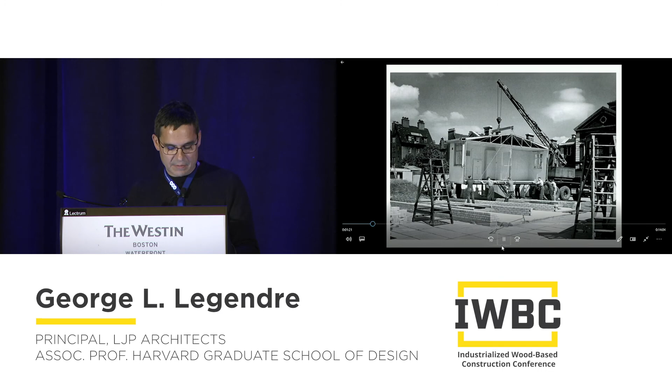Sometimes it seems that OSM is like a new material, like graphene or polymer, a new material with wondrous possibilities. Well, not quite. Because OSM is not that new, is it? This German gentleman, the Bauhaus, first proposed it 100 years ago as a socially progressive model for mass housing. And indeed, affordable housing has been its vocation pretty much throughout the 20th century.

Today, however, while need remains an important factor behind OSM, it's no longer the only one. You see, desire in all its contemporary forms is equally important. I'm thinking consumer politics, digital technology, social media culture, and of course, money.

In Portugal, for instance, timber joiner Mima markets OSM as a luxury product rather than building. This is industrialized timber, and architecture for that matter, marketed as desirable accessories rather than the stuff of home or shelter. These ads suggest a return to the basics of dwelling and sitting around, but in truth, the product is quite expensive. The new minimalism isn't about ending consumerism. It's about taste, luxury, and inevitably about exclusion, a far cry from the real places where such dwellings remain the norm.

Digital technology is chipping in as well. Cover, a small LA-based company with a secret house design algorithm, sees OSM as architecture's answer to Tesla. House design algorithms are an old, perhaps futile claim made by at least two generations of digital designers. But coming from Silicon Valley in the age of Uber, we could be ignoring this one at our own peril. And by the way, Cover collects credit card details from its clients before even meeting them. I think we could all learn from that.

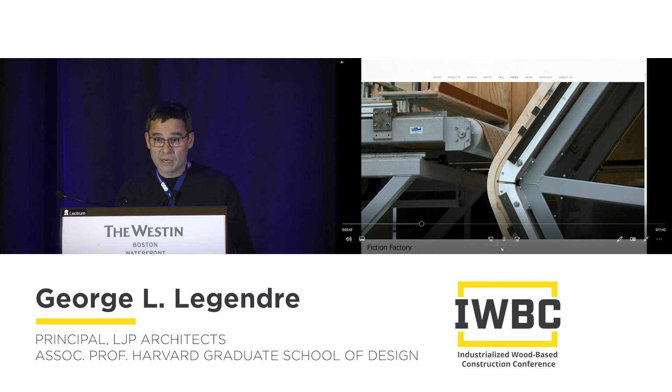OSM is often perceived to be about objects rather than places, and that's sometimes true. How else could you explain that in this Amsterdam factory, a group of makers creates houses by spinning recycled wood pulp around an axle. Yes, that's right. These people make homes like airport staff wrap suitcases with protective cling film. And it works beautifully. But maybe it's hard to take it seriously.

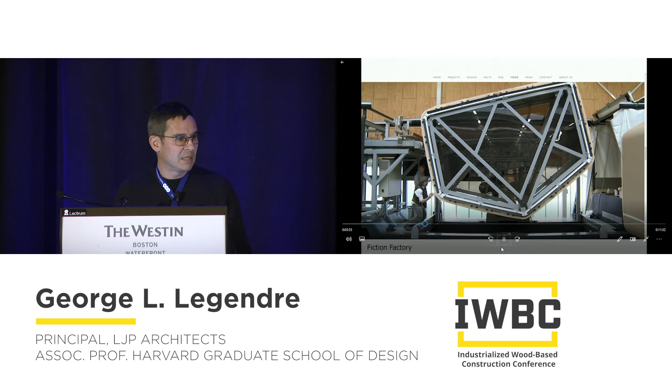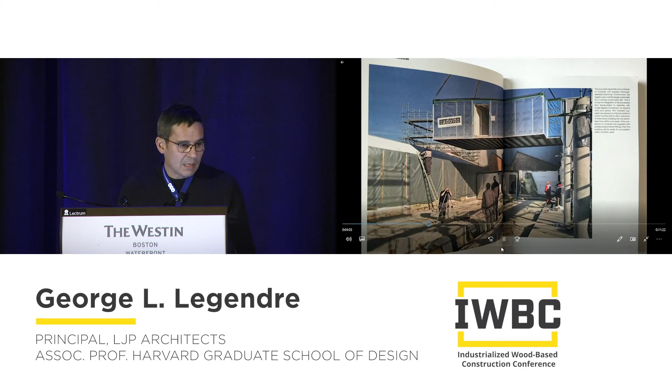And yet, OSM is not only about objects and one-offs. In post-industrial Manchester, the local urban and architectural language helped revive, one CLT box at a time, that enduring icon of European urbanity, the Edwardian terrace. In 21st century Britain, a culture completely obsessed with a house, these prefabs by architect shedkm are among the most desirable homes.

So in the UK, where Robert and I live and work, that is now the way of the world. A few years ago, a venture fund wishing to invest in housing would have reached out to developers, urbanists, engineers, architects, and local officials. Today, it's more likely to start the conversation by building itself a futuristic home factory.

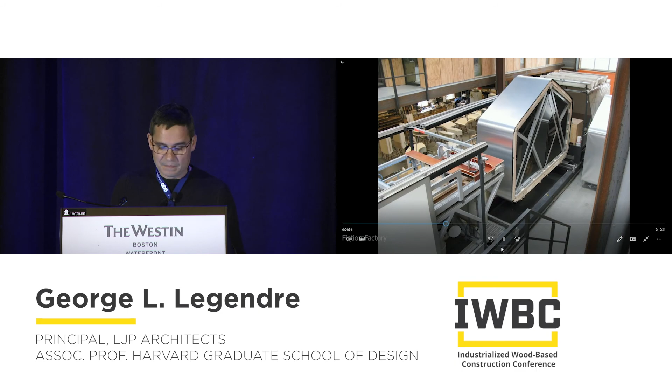So yes, the social modernist project pioneered by the League of German Gentlemen is happening, all right, but in a pluralistic, unplanned, capitalistic way. So this new world is our background as designers, and it's very exciting.

When sometime during the next 10 years the economies of scale kick in, OSM will be cheaper and greener than conventional construction. But there's more to it. There are a lot more reasons why industrialized construction is important to us designers. The real draw lies in recognizing that it's all about process, and a conceptual process at that.

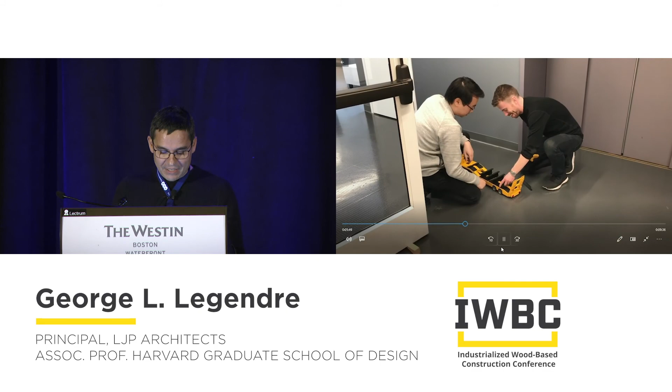First of all, there's the primal pleasure of working that way, and it doesn't go away with age or education. These two grown men, and soon to hold a Harvard degree, hopefully, rediscover their inner child while exploring sophisticated integrations of transport and construction.

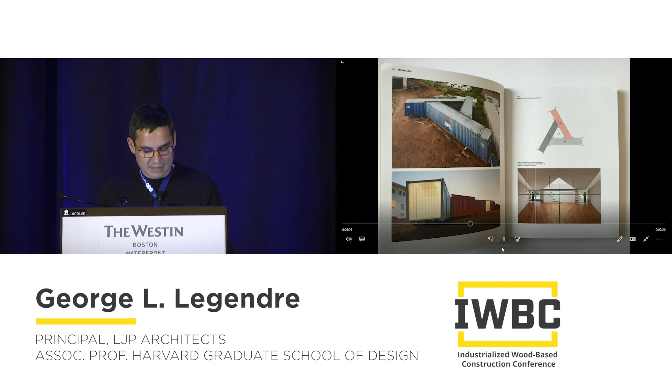With OSM, simple constraints inform our thinking: protocols of assembly, tooling, the width of a room, and of course, the width of a freeway on which it is trucked, one piece at a time, like a gigantic model from the land of Gulliver.

Architect Andrew Waugh says that the width of the motorways will determine the form of future cities in the same way that a standard plot width determined the form of Victorian London. And he is right.

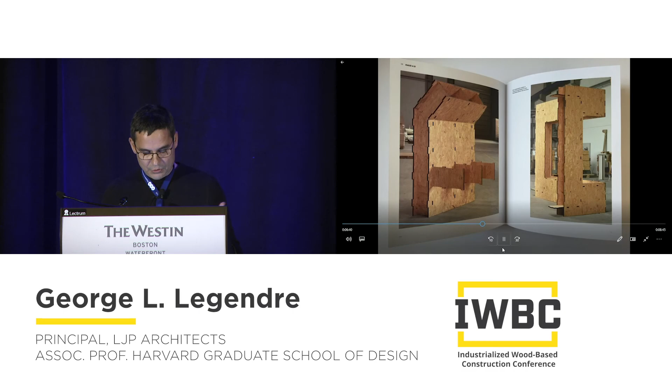And there's more. With its scale shifts, design patterns, and strangely direct translation from making to building, OSM has as much in common with the work that takes place here in the studios of the Harvard Graduate School of Design as it does with traditional building.

Sometimes I even think that people out there in the industry aren't making buildings at all, that they're making one-to-one models. Or maybe it's the other way around. Robert and I were intrigued by the comparison, so we set out to systematically explore it for 2 years.

My group approached the subject through making. We made models to understand the process of construction and delivery, models that serve as both design record and proof of concept, if you like, models as buildings.

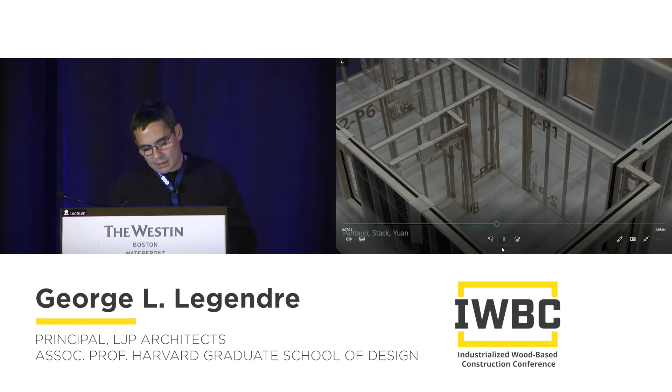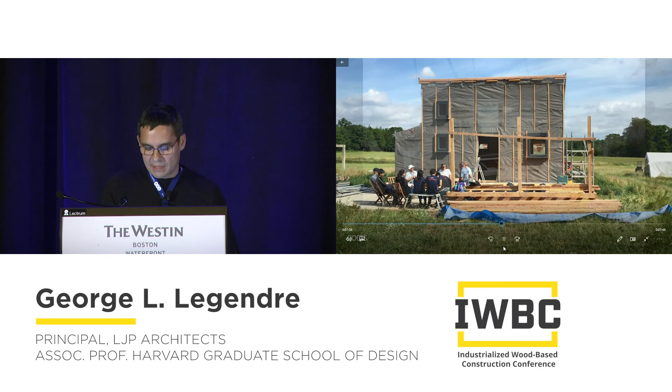Robert introduced the case studies in his talk, Multiply by WTA, shown here in the courtyard of the V&A in London, Riverford Gardens and the Falkland Bothy up in Scotland, the futuristic Dyson Institute in Wiltshire. These projects couldn't be more different in scope and budget, but they were all planned and built in the same way.

There are 3 key drivers behind our interpretation of OSM. The first is transport.

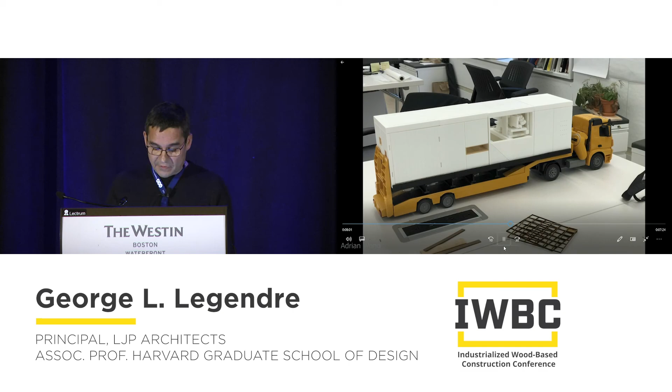OSM is about building anywhere that is, except on site. And that makes a lot of sense from the vantage point of quality control. Proponents of OSM will ask sensibly whether you'd buy a new car built in a field. So, OSM doesn't care where your site is, so long as the delivery man can reach it.

It's a little bit like Little Chef, the British roadside diner, where the omelette on the menu isn't actually an option because, the waiter explains, head office hasn't put one in the post this morning.

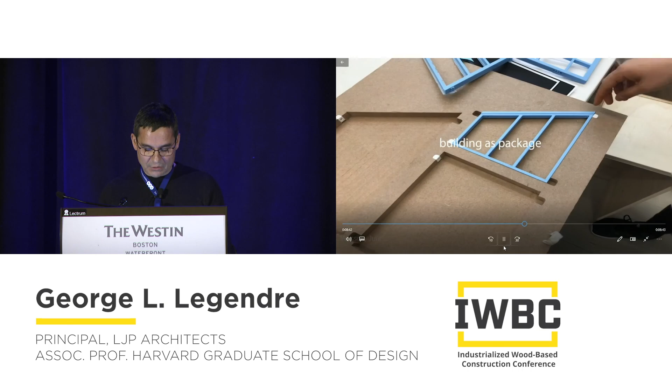So we looked at construction as a packaging problem, building as suitcase and building as crate. This, by the way, is already happening in practice. At CCG, closed panels are carefully gift-wrapped at the end of the assembly line.

So we spent time exploring that problem, the problem of packaging, crating and decrating our future homes, and exploring visionary ideas at a smaller and experimental scale.

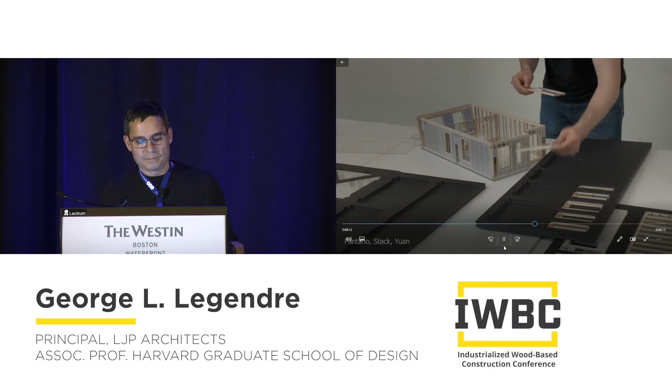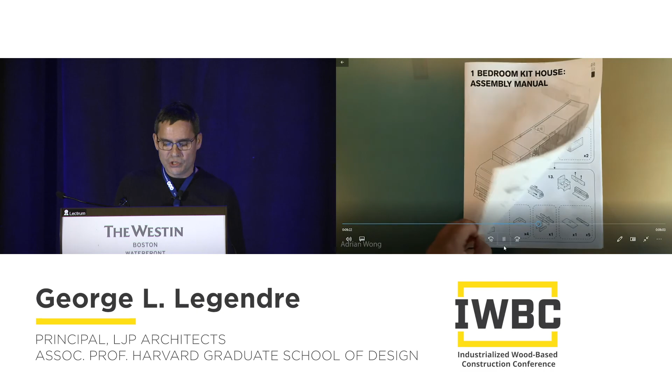Our second driver is the role of construction documents. As product design, manufacturing, and construction increasingly merge into one, tender packages in the future could look like self-help assembly manuals, like IKEA super brochures of sorts.

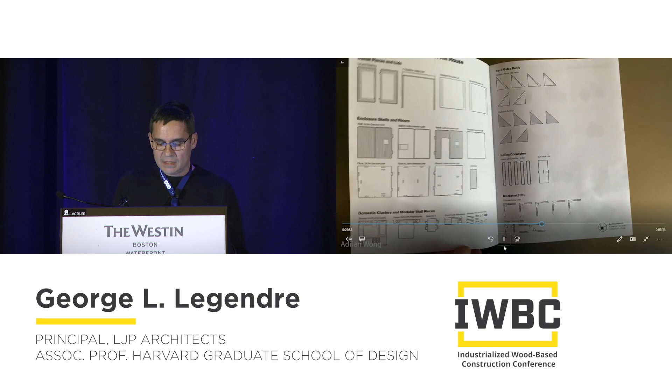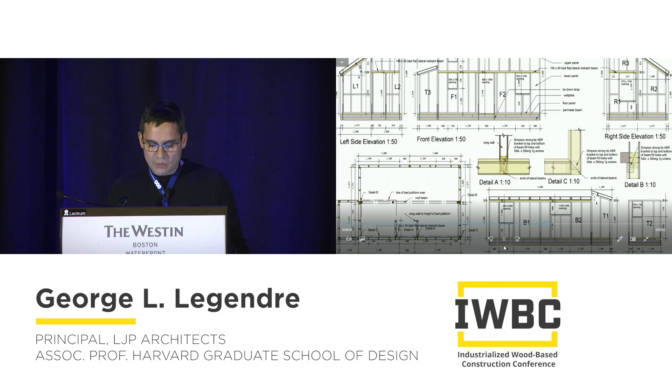We looked at this scenario in terms of graphic design, but also in terms of construction. Processing the original documents supplied by Robert was a key part of that approach, the raw material of the process.

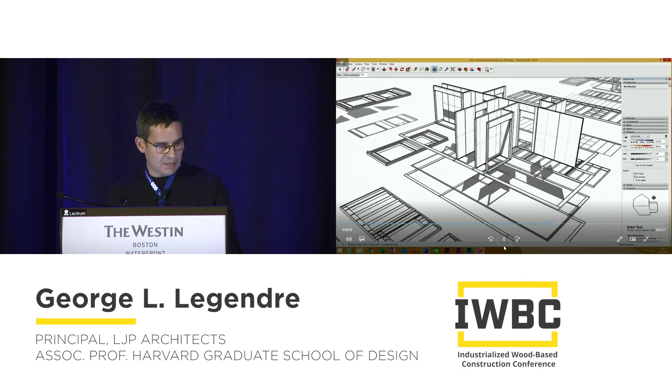And the 3D models developed by the contractor and shop drawings coming from them are at the same unit-free scale, so we can use the same data to cut a timber at 1:1 in a building workshop or 3D print nylon at 1:30 on a kitchen table.

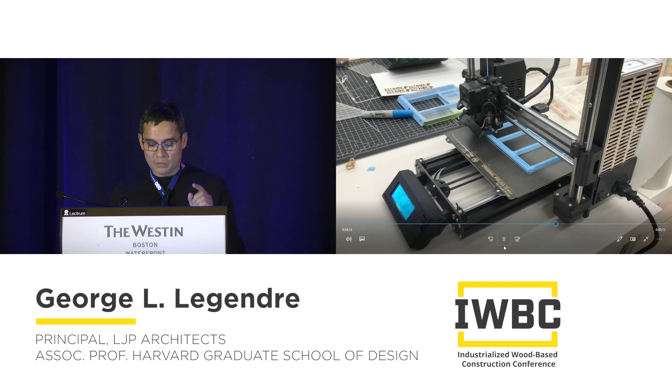There are a lot of analogies between these two processes, of which more later, but what matters here is that they share a single starting point.

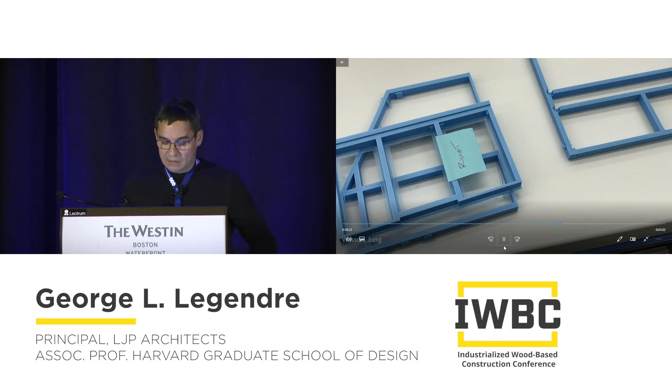Off-site manufacturing means building by numbers as well as letters, so OSM won't work unless the parts are clearly labeled. Labeling is an integral part of the design process. We do it in our own practice in London, where a kit of parts and a labeling protocol are both mathematically generated.

With the same protocol finding its way seamlessly into construction, we saw something similar in action at CCG, where every single loose joist on the factory floor has a unique ID, usually printed, sometimes scribbled by hand, and held in a master list moving from monitor to monitor as the panel makes its way through the assembly line.

Of all the factory floors I've been to, and there aren't that many, I have to say CCG seemed to me by far the most futuristic. And don't get me wrong, there are no robots or drones around, just people. Drones are still a few years away. But I'm not talking about hardware, I'm talking about the firm's mindset.

CCG's rigorous automation of the assembly process, complete with performance indicators and productivity bonuses for machine operators, offers a plausible vision for the future of construction.

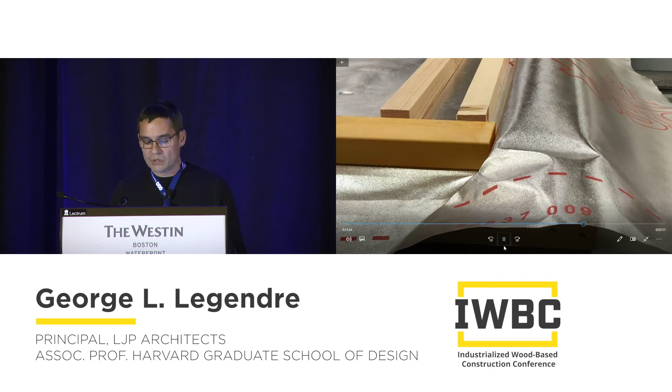No OSM without proper labeling then, so we made sure that labels were properly integrated in our designs and dramatized for effect. Our goal was to fuse two things normally occurring in sequence and hence generally kept separate: the shop drawings on the one hand, the finished building on the other.

That's it. Our third and final driver is the role of materials. So I'm sure you noticed there's quite a bit of plastic flying about. Plastic is not a material commonly associated with construction. We chose it for its transparency and the convenience of revealing the layers of joists, insulation, waterproof membrane, and finish of closed panels in residential construction.

We were less concerned with the look and feel of materials, in this case wood. We were concerned with the breakdown and reassembly of the constituent parts: floor cassettes, closed panels, panels inside panels, and so on. That's probably where our working metaphor, building as model, model as building, breaks down a bit, because we have no use for real materiality. But—

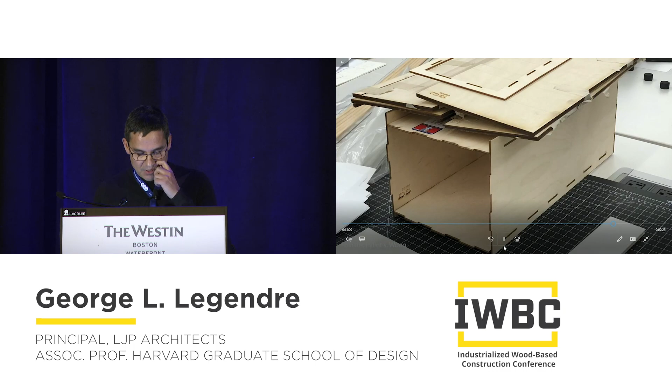That's not to say that the properties of wood were not important to us. Far from it. Our palette of choice did include wood, and two teams experimented rigorously with it. At scale 1:20, the bonded layers of plywood behave very much like the lamellas of CLT at full scale. But these structural properties are not rigorously scalable, so there's a limited value to the comparison.

Of equal interest, perhaps, is the comparison between machines. Most of the material that goes into a closed panel is flat sheet cut, laid, and fastened using an arm with 3 degrees of freedom or axis and one fixed flat bed.

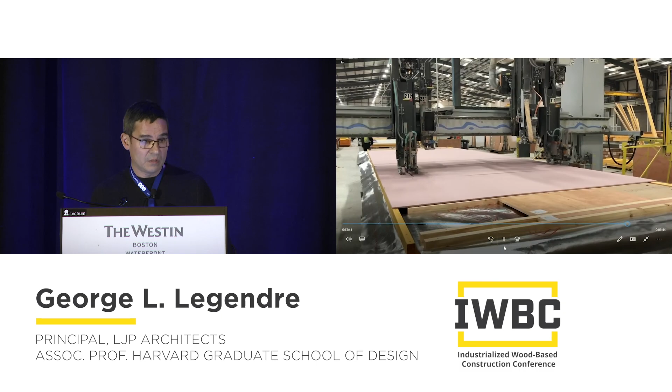From that narrow perspective anyway, this expensive machine on CCG's floor is no different from the laser cutter we use in my London office, or indeed from the fused filament deposition printers the students use to knock out working prototypes throughout the semester.

Doing it this way is very convenient, but also kind of a conundrum. I wouldn't risk being tarred and feathered out of this room for suggesting we all swap wood for plastic. It's just uncanny that we choose to laminate something when cutting can do the job.

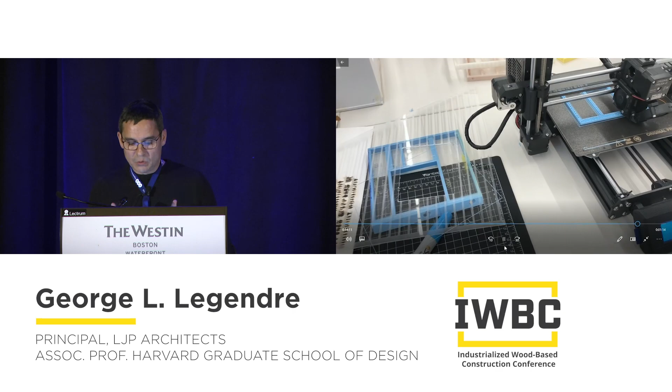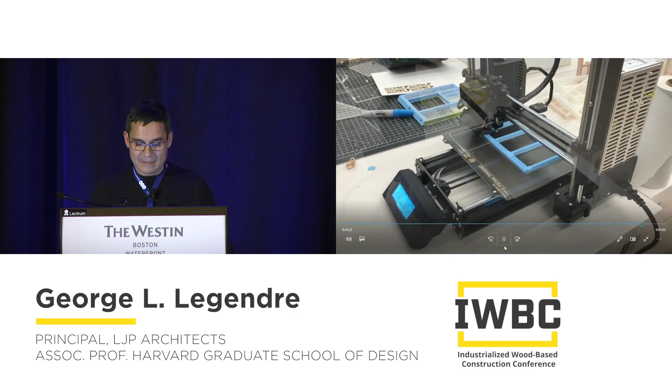Choosing the right manufacturing approach for the right constraint is not just a technical matter, but also an environmental one. So in the future, a rectangular frame with a square section could be printed using recycled wood pulp. In the meantime, it should probably just be cut.

Finally, these models as buildings were designed to be performed. The students gave a demo this morning. We'll give another one after this. And most of the work is on display outside the hall. I'm going to leave you with a sampler of these performances, which can run up to 10 minutes each, and hope you enjoy them. I wish to thank the students for doing their outstanding research work and giving their consent for inclusion in this summary.